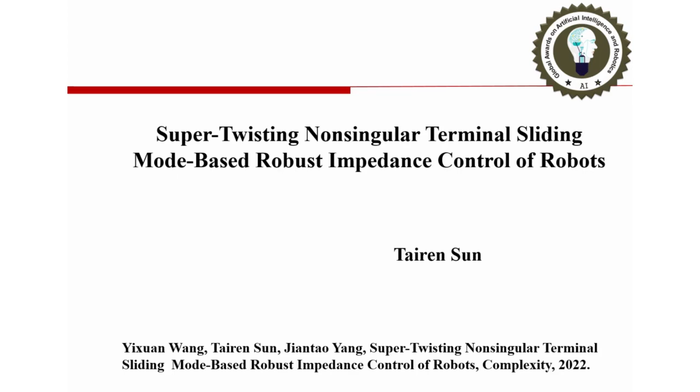In the last several years, we have published several papers on impedance control. The first and the second are about constant impedance control. We improved the impedance control methods by using composite learning and human-robot interaction signals. In the third results, we have constructed the desired variable impedance dynamics and guaranteed its stability by proposing constraints on impedance profiles.

There are also some other results, including the fifth and the sixth results. It's about impedance learning control used in human-robot interaction in repetitive motions.

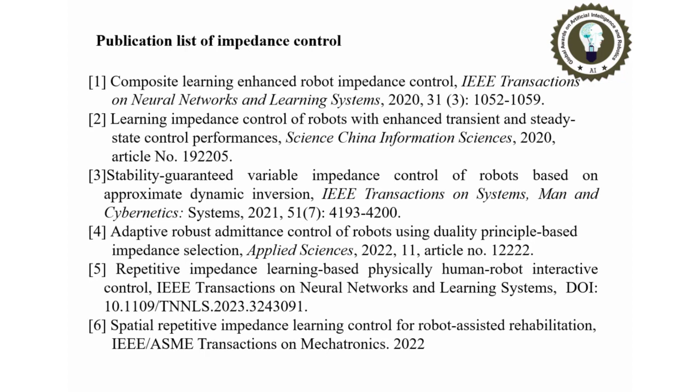Let me introduce the background for this presentation. Impedance control is an important active compliance control approach and has been widely applied in grinding, handling, rehabilitation, and some other applications. However, robot modeling uncertainties, which include external disturbances and parameter uncertainties, severely affect impedance control stability and robustness.

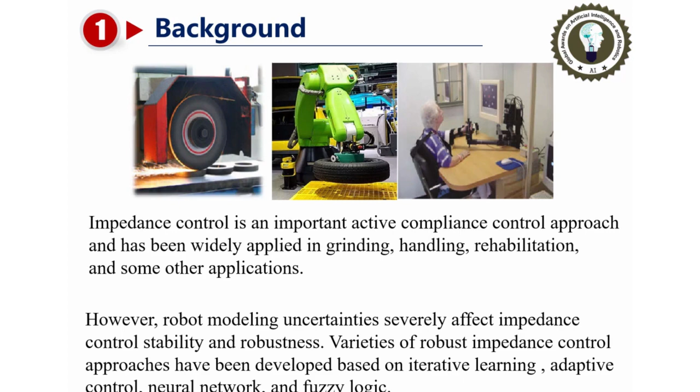In the last decades, varieties of robust impedance control approaches have been developed based on iterative learning, adaptive control, neural network, and fuzzy logic. But these developed results have some differences. Iterative learning impedance control is mainly applied in repetitive motions. Adaptive control requires linear factorization of robot dynamics. The linear factorization requirement limits the application of the adaptive impedance control.

Neural network and fuzzy logic impedance control usually obtains boundedness of impedance errors and cannot get the convergence of impedance errors to zero. In addition, the use of neural network and fuzzy logic usually leads to undesirable computational complexity.

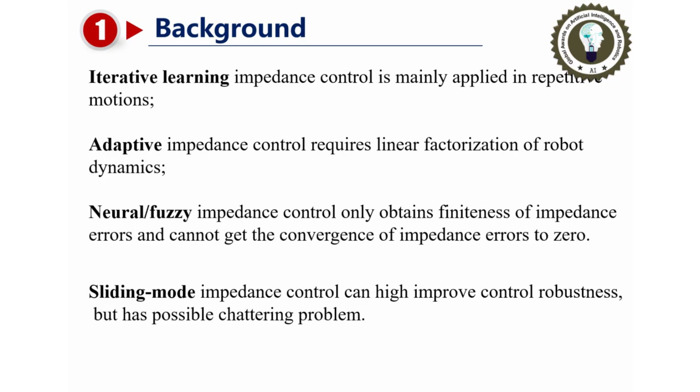There is also a method, sliding mode impedance control. This method can improve control robustness by using sliding mode, but it has a possible chattering problem. In this paper, we improved the impedance control robustness and stability by using sliding mode without introducing severe chattering.

In this part, we give the robot dynamics in this paper. Consider a robot arm with the following dynamics in equation 1, where q and q dot denote the robot angle and velocity, respectively. M(q) denotes the inertia matrix. F denotes a known robot function. Delta denotes the robot modeling uncertainties. Tau is the control input. Tau E is the interaction force in the joint space.

To facilitate the following control design, we suppose the following assumptions. Assumption 1: the desired trajectory qD and its first and second order time derivatives are bounded. Assumption 2: on a compact set omega, the uncertainty term delta satisfies that the time derivative of delta is bounded by a positive constant Dmax.

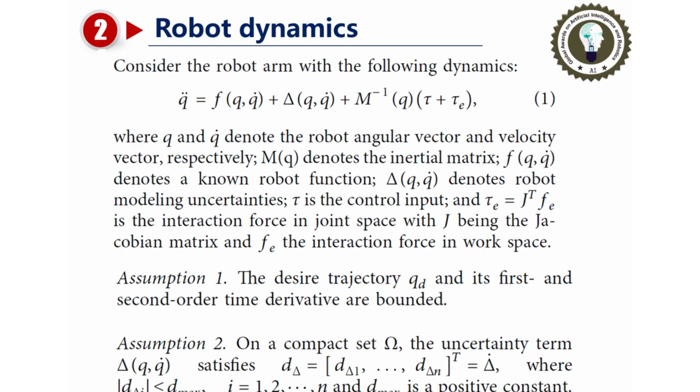We aim at achieving a desired dynamics in 2, where MD, DD, KD are the impedance profiles and are usually assumed to be positive diagonal matrices. First, let's pass tau E through a low-pass filter in 3. Then the impedance dynamics in 2 can be expressed as in equation 4, where qR equals qD plus qE and denotes the constructed impedance trajectory.

Let's define E1 equals qR minus q, and E2 equals qR dot minus q dot. Then we define the impedance error EIM equals the right part of the equation minus the left part of the equation. Then the impedance error can be expressed in the following form, in equation 5. We can see from 5 that the convergence of E1 and E2 can guarantee the convergence of impedance error EIM.

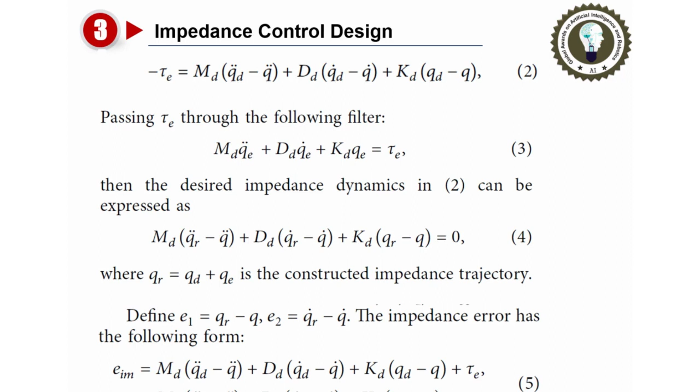Thus, in the subsequent impedance control design, we will design a sliding mode-based control such that E1 and E2 converge to 0. The control design is stated as follows. Define the following sliding mode, equation 6: S equals gamma E1 to the power alpha 1 over alpha 2 plus E2, where alpha 1 and alpha 2 are odd and satisfy the condition.

Based on dynamics in 1, the dynamics of S satisfies the dynamics presented in equation 7. Based on this, it's convenient for us to design the following sliding mode control. It's very obvious that this part of the control is a continuous function of time t. Therefore, the control input tau is a continuous time function.

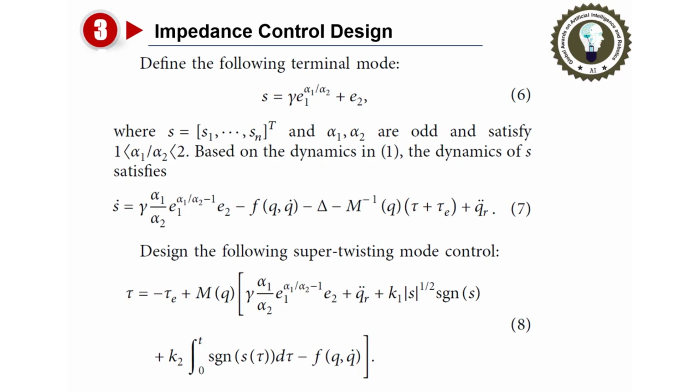Under the proposed sliding mode control for the robot with dynamics 1, the errors E1, E2, and E2 dot converge to 0 in finite time. This further guarantees the finite time convergence of EIM, that is, the impedance error. The finite time convergence further guarantees the realization of the impedance dynamics in finite time.

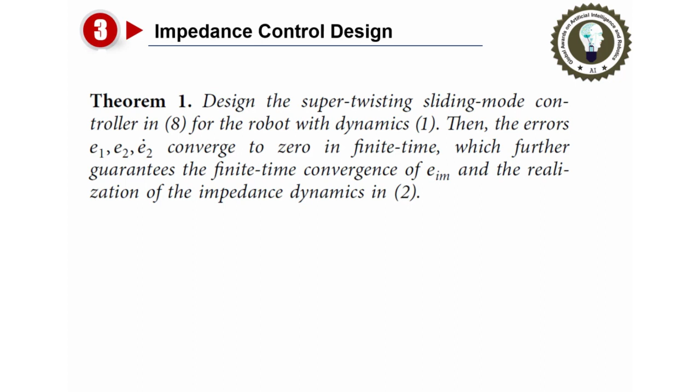To validate the control effectiveness, we make simulations on a two-link robot arm. In the simulation, we choose the interaction force as Fe equals 5 sin 0.2t, 5 cosine 0.2t. And the control parameters are gamma equals 3, alpha 1 equals 5, alpha 2 equals 3, Q1 is 8, and Q2 is 10.

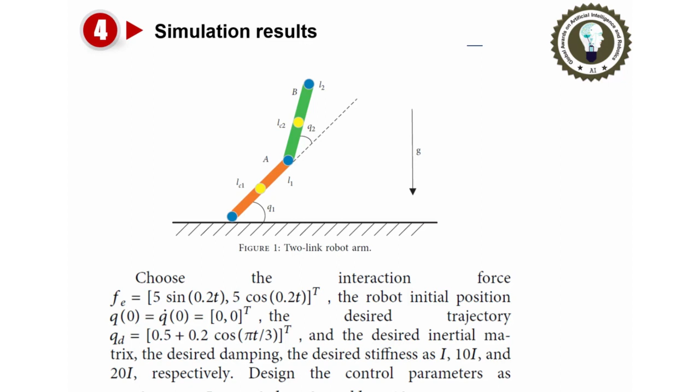The simulation results are presented in figures 2 to 4. Under the impedance controller, the errors E1 and E2 converge to 0 quickly, which further guarantees the convergence of the impedance error EIM. From this result, we can see that the chattering in traditional sliding mode control is not serious.

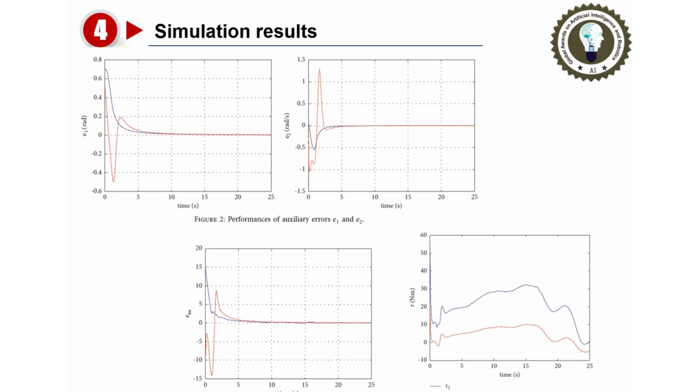Let's make the conclusions. This paper proposes a super-twisting sliding mode impedance control for robots to improve the compliance and robustness of robot-environment interaction. The main contribution and innovation of the paper lie in the super-twisting sliding mode impedance controller. It improves the impedance control robustness without causing chattering.

In the near future, we will construct finite-time impedance dynamics. The dynamics can guarantee the convergence of the desired impedance dynamics in finite time if the interaction force is 0. This is very important because the fast convergence of trajectory tracking will improve human-environment cooperation. We also want to design robust impedance control by using a sliding mode observer. That's all.